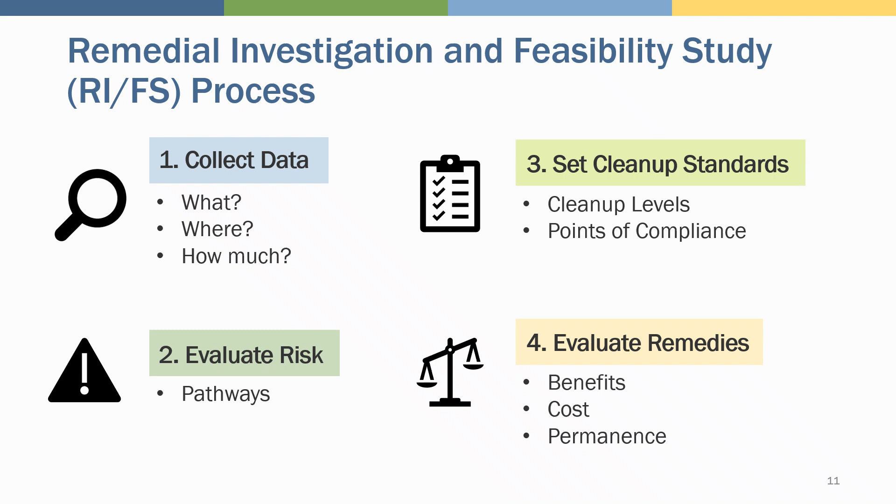As we go through the Rayonier Mill study area, I will try to cover what we know about the contamination, pathways of exposure, cleanup levels, and the selected remedy for each media, such as sediment, soil, and groundwater. So let's dive into the Rayonier Mill study area.

One of the challenges we have had with the Rayonier Mill site is defining the site boundary—that is, where has all of the contamination come to be. The challenge has been in the off-property area from wind-blown pollution and the spread of contamination in the harbor. So Ecology and Rayonier agreed to focus on a study area, or a portion of the site, as shown here. Our March 2010 agreed order with Rayonier is for this study area. We will be evaluating the off-property contamination separately.

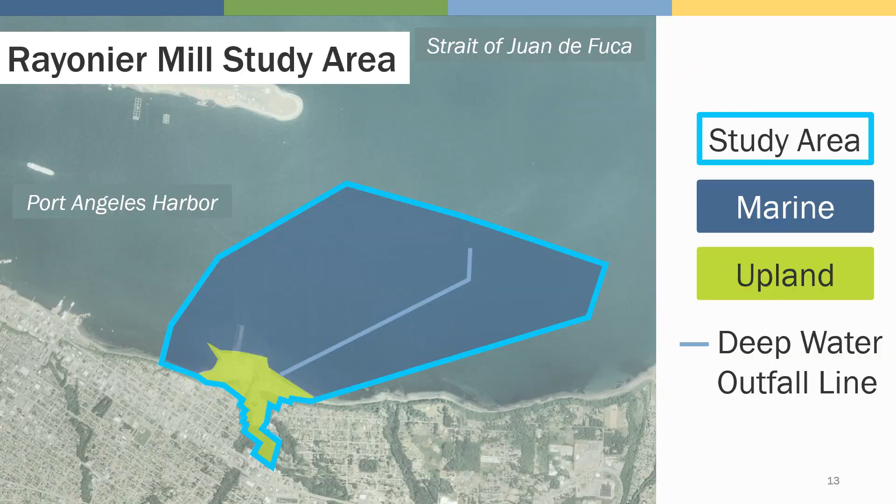This shows the relationship between the Rayonier Mill and Western Harbor study areas. Both cleanup projects address the entirety of the harbor.

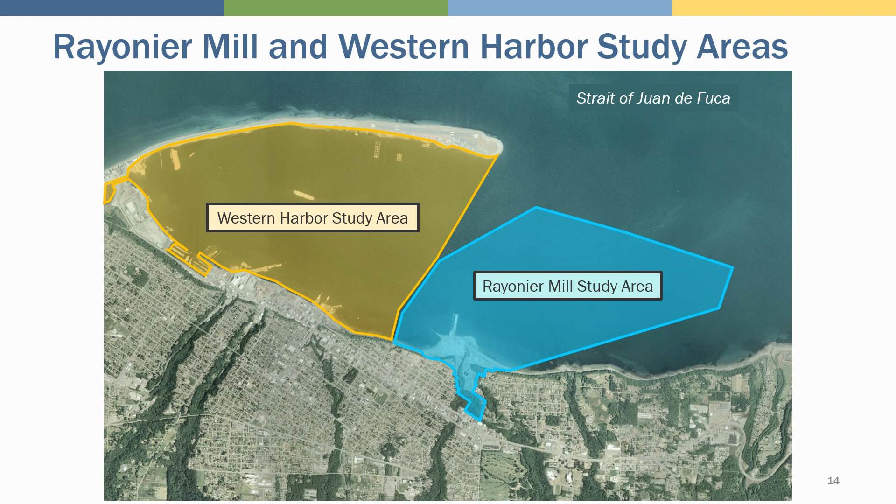Before I launch into the history of the Rayonier Mill, I thought I would clarify the company names: Rayonier, RYAM, and RAMP. Rayonier Inc. owned and operated the mill at the time of release of contamination. In 2014, Rayonier Inc. split into two companies: Rayonier Inc., the Forest Resources and Real Estate entity, and Rayonier Advanced Materials, the Performance Fibers entity. This second entity is also known as RYAM.

In addition, there is Rayonier AM Properties LLC, which manages the environmental liabilities. This is known as RAMP. Both RYAM and RAMP have signed the consent decree. When we say Rayonier, and I say it a lot, we are generally referring to RYAM and RAMP.

The Rayonier Mill operated for nearly 70 years, from 1930 to 1997. When the mill closed in 1997, Rayonier systematically dismantled the facility and completed several interim actions on the property. The mill property holds great cultural importance to the Lower Elwha Klallam, Jamestown S'Klallam, and Port Gamble S'Klallam tribes.

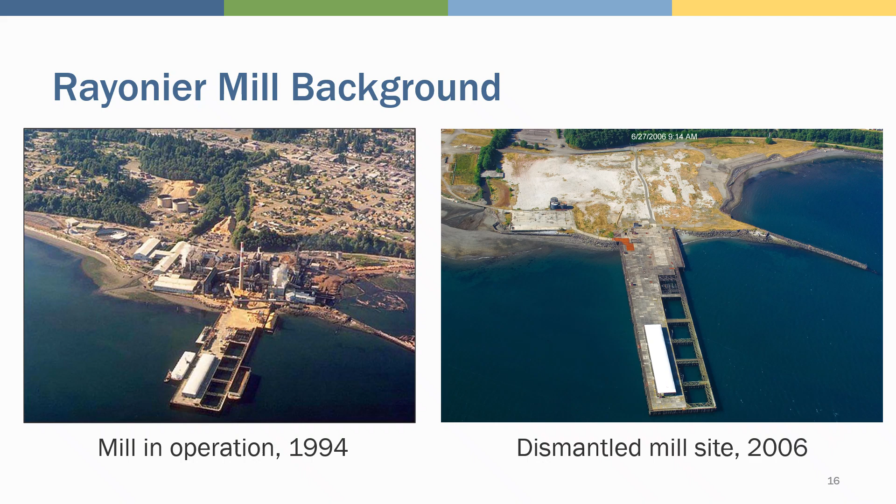This is a schematic of the mill operations. The mill was a pulp mill making pulp from wood chips using an acid sulfite process. The mill had 5 outfalls, which discharged untreated wastewater directly to the harbor until 1972, when Rayonier built the large storage tanks and treatment process for their wastewater. The treated wastewater was then discharged from the deep water outfall.

Mill operations caused contamination of the mill property and nearby marine environment. Contamination came from air emissions from a hog fuel boiler, fuel spills, releases from electrical equipment and other mill activities, and discharge of untreated wastewater to the harbor.

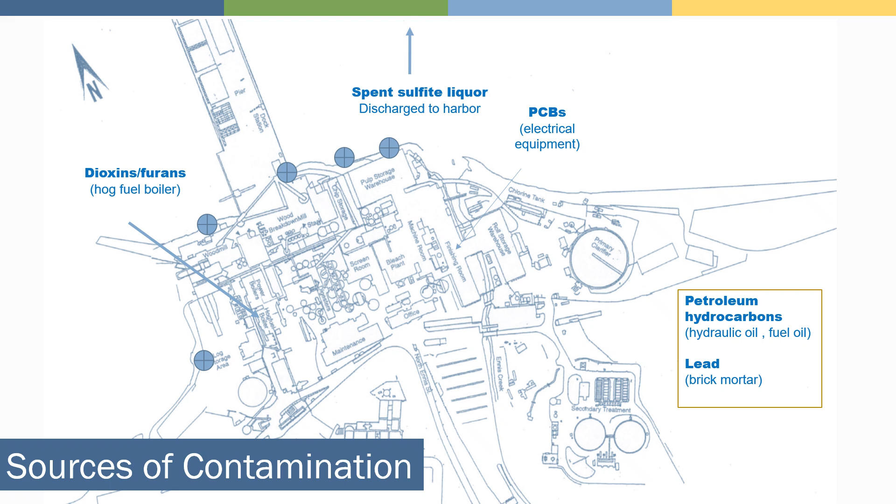In the early 2000s, Rayonier conducted several investigations which identified some high-level contamination areas, or hotspots. Rayonier conducted several interim actions. This figure shows the locations of the interim actions. Over 30,000 tons of contaminated soil were removed and taken to appropriate disposal facilities. Most of the contaminated soil was disposed of at the City of Port Angeles sanitary landfill, and petroleum-contaminated soil was taken to a treatment facility in the Tacoma area.

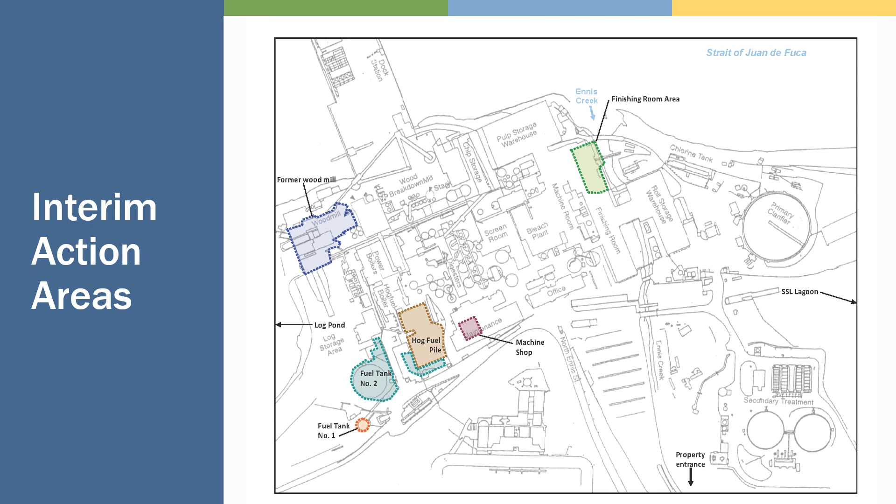Rayonier has completed a remedial investigation for the upland portion of the study area, or Volume 1, a remedial investigation for the marine portion of the study area, or Volume 2, and a feasibility study for the whole study area, or Volume 3. Ecology conducted a public comment period for Volumes 1 through 3 in the fall of 2019. We received about 160 comments and completed a responsiveness summary in early 2021. After making a few revisions, Rayonier finalized Volumes 1 through 3 in 2021.

Under the 2010 agreed order, Rayonier was also to complete a first draft of the Interim Action Plan, or Volume 4. While Rayonier submitted a first draft, it was not to the level that Ecology expected. As the Cleanup Action Plan, or Interim Action Plan, is ultimately an Ecology document, Ecology revised the draft we received from Rayonier into Ecology's document describing our selected remedies. This is what we are presenting for your public input.

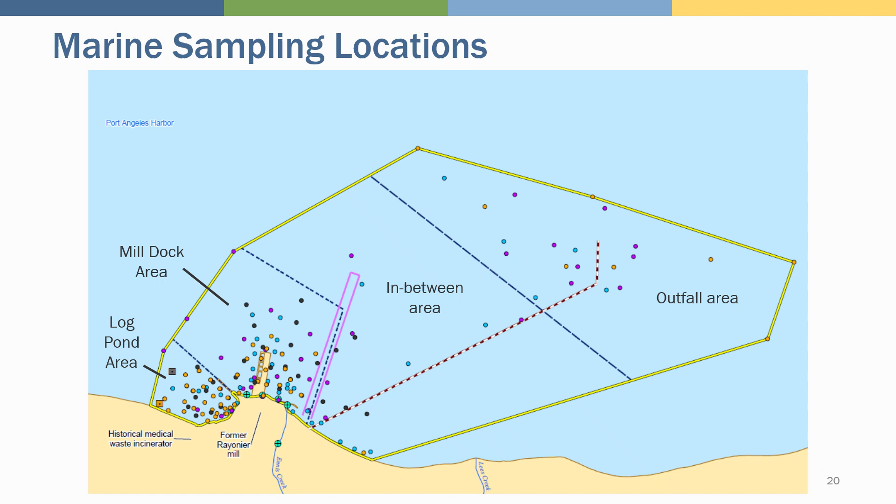Contaminants found in sediment and tissue include heavy metals like arsenic and mercury, polychlorinated biphenyls or PCBs, polyaromatic hydrocarbons or PAHs, and dioxins. Sediments also have phthalates and phenols and wood debris. Toxicity testing shows toxic effects to benthic organisms, the small critters that live in the sediment. The higher contamination and toxic effects are near the mill, around the dock, and in the log pond. I'll show the contamination pattern in a few more slides.

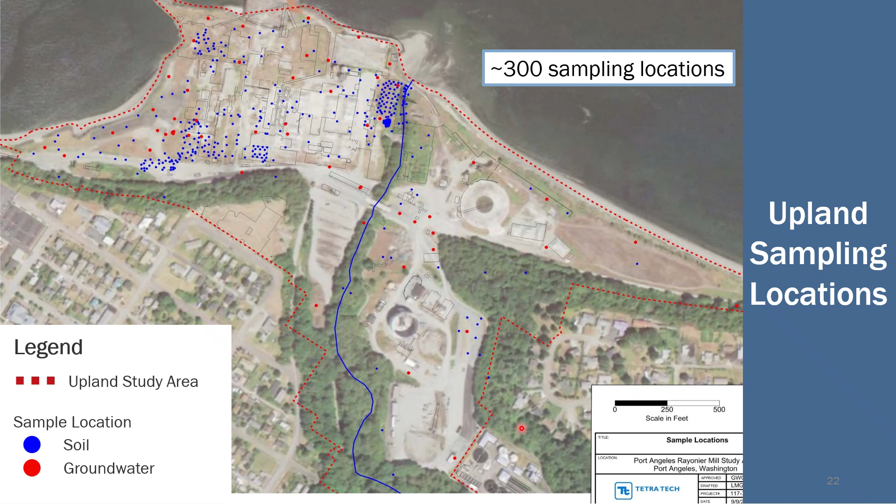Contaminants found in soil include heavy metals like arsenic and lead, polychlorinated biphenyls or PCBs, polyaromatic hydrocarbons or PAHs, dioxins, and petroleum hydrocarbons. Contaminants found in groundwater include PAHs and ammonia. The presence of ammonia has caused the pH of groundwater in some areas to be very high. The high pH can cause the metals in soil to release and go into groundwater, so we also see metals in the groundwater. Most of the highest soil contamination, or hotspots, have been removed.

Both soil and groundwater contamination is spotty without a clear pattern, and kind of all over. We see higher soil concentrations in the West Mill area and higher concentrations in the surface soil rather than at depth.

We evaluated the risk from these contaminants and determined that there are complete exposure pathways. Humans and wildlife and plants can come into contact with contaminated soil. Contaminated groundwater can reach the marine environment, potentially impacting the water and the sediments. Contamination in the sediments is bioaccumulating into fish and shellfish, to which humans and other animals can be exposed. And the creosote pilings and timbers are an ongoing source of PAHs to the sediments.

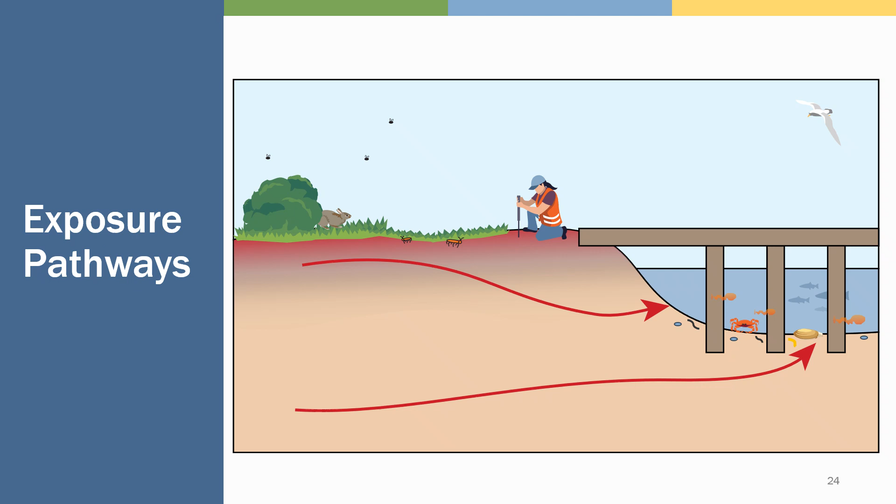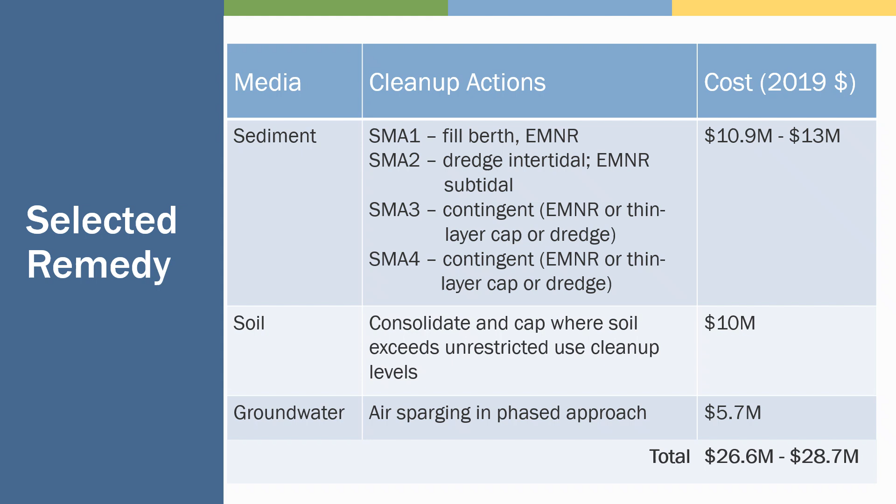So we selected remedies for each media to address these pathways of exposure. This is a summary of the selected remedies as presented in the draft Interim Action Plan. The costs are those from the Volume 3 report, so are in 2019 dollars. The costs are likely higher today due to inflation. The overall cost is around $30 million. I'm going to go through each of the cleanup media and walk through these selected remedies.

Let's start with the sediment media. Sediment is the sands and mud under the water. Again, the main contaminants in sediment include metals, PAHs, PCBs, and dioxins. We set sediment cleanup levels to protect for bioaccumulation from sediment into fish and clam tissue that humans or other animals may eat. We also set sediment cleanup levels to protect the benthic organisms, or critters that live in the sediment. The sediment cleanup levels generally need to be met in the top 10 centimeters or 4 inches, and deeper, such as 45 centimeters or 18 inches, in areas where we dig clams.

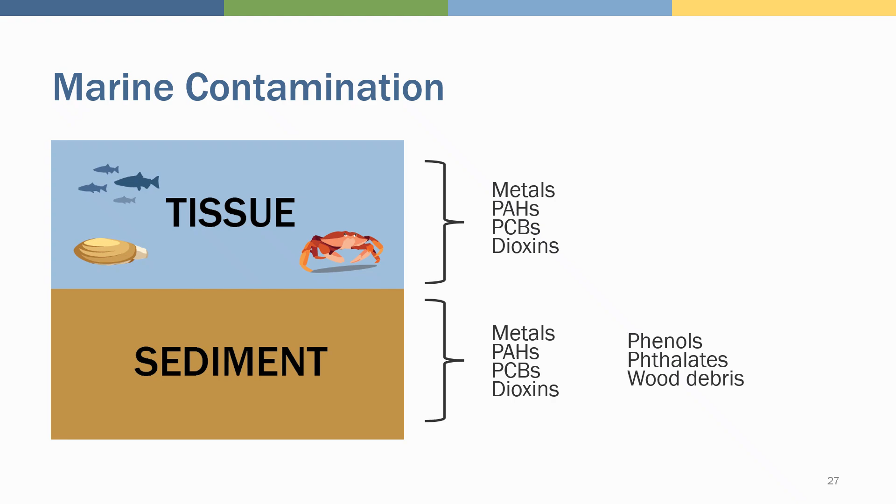This figure shows the concentration of PCBs, or polychlorinated biphenyls, and dioxins in sediments. We show these as total TEQ, or toxic equivalent. Dioxins and PCBs are chemically and toxically very similar, so we combine them into a TEQ. TEQ stands for toxic equivalent and is a special sum where the concentration of each individual contaminant is adjusted based on how toxic they are, and then they are summed together. The green, yellow, and orange are above the sediment cleanup levels. This figure shows the contamination is close to the mill dock and in the log pond area.

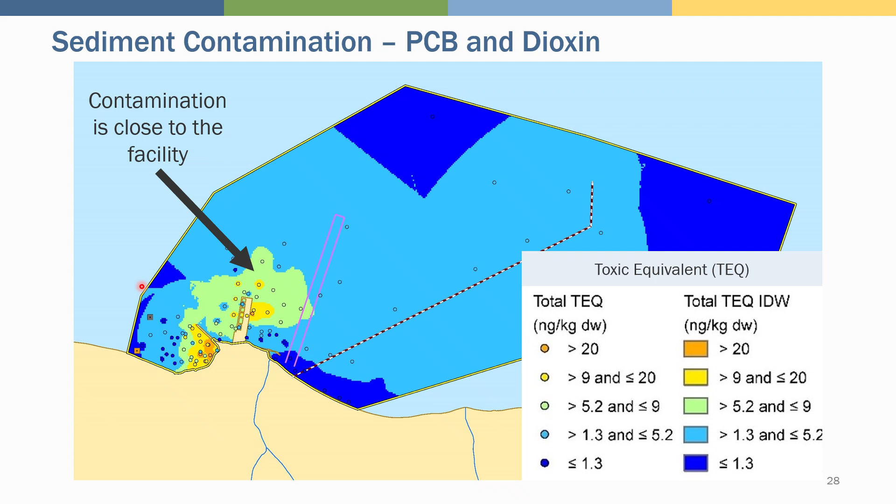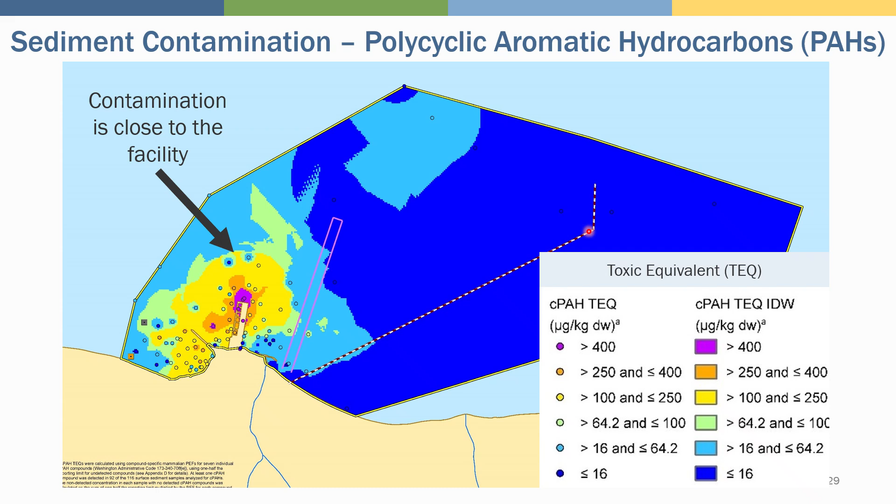This figure shows the polycyclic aromatic hydrocarbons, or PAHs. Again, the green, yellow, and orange are above the sediment cleanup levels. The figure shows contamination is close to the facility, around the mill dock, and in the log pond. The sediments out by the deep water outfall meet cleanup levels for PCBs, dioxins, and PAHs.

This figure shows the sediment remediation footprint. The bold red line is the footprint. This captures the PCBs, dioxins, and PAHs. It also captures areas where contaminants show toxicity based on bioassays. We need to take cleanup action within this footprint to reduce exposure to contamination. Beyond the bold red line, the sediments meet cleanup levels and no action is needed.

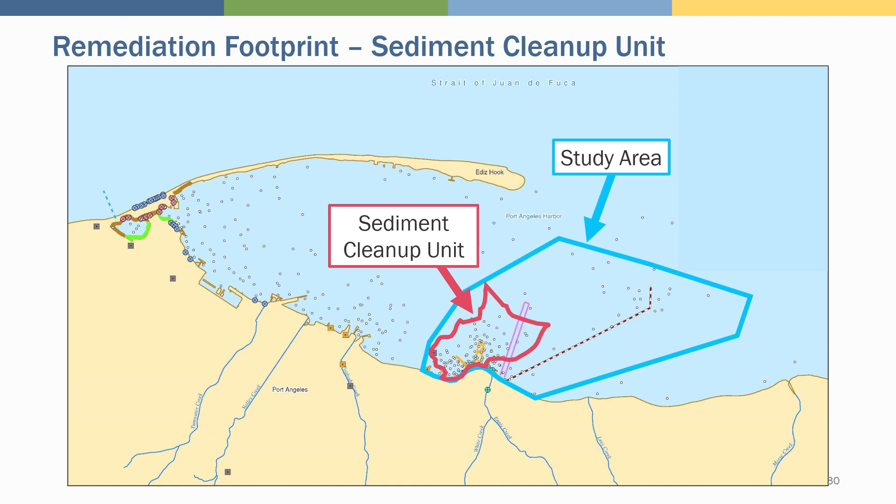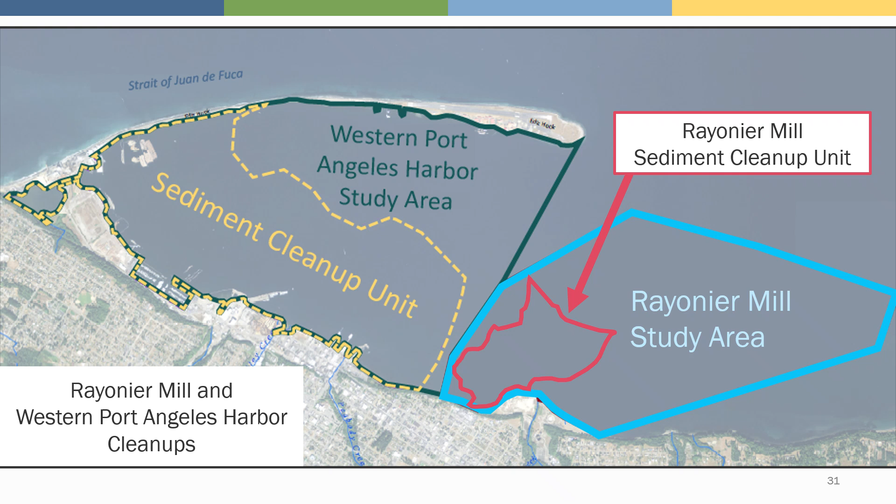Earlier this year, Ecology presented the Cleanup Action Plan for the Western Port Angeles Harbor Study Area. I thought I would show a comparison of the two study areas and the two sediment cleanup units. Cleanup actions will take place within these two sediment cleanup units, addressing contamination in the whole of Port Angeles Harbor.

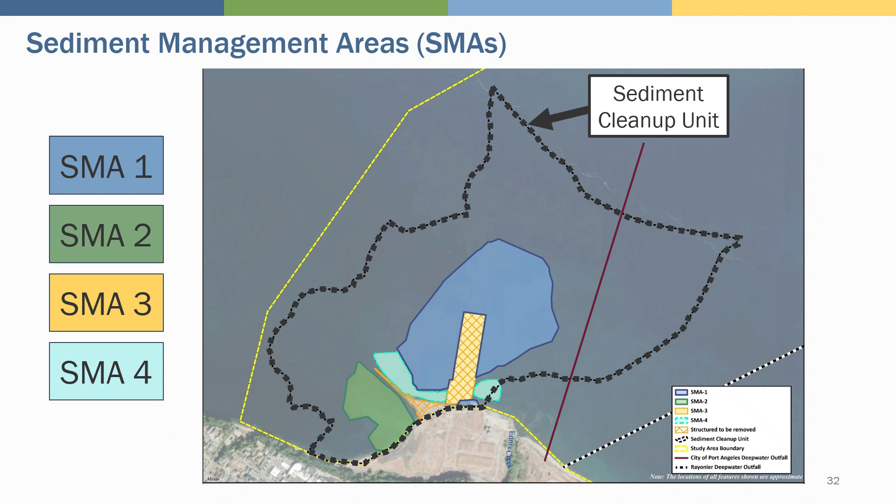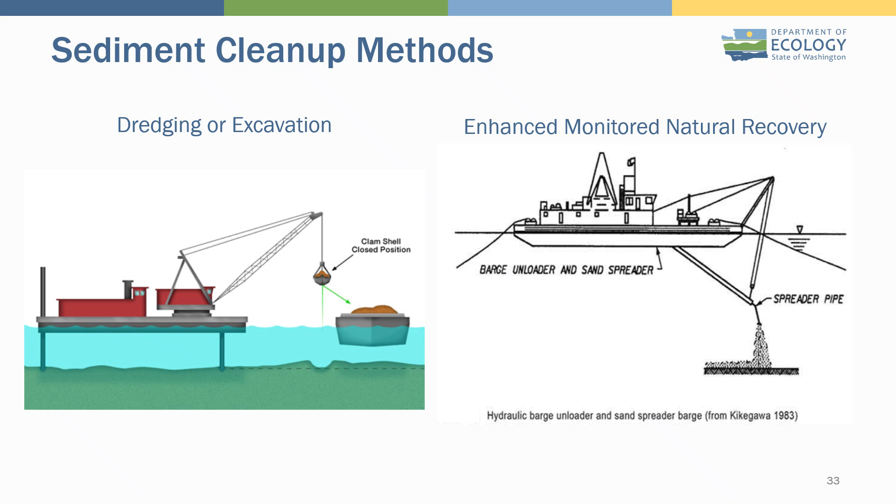For SMA 3 and SMA 4, under the dock and in the nearshore, the remedy is a contingent remedy. SMA 3 is the area under the dock. The very large dock structure has made it difficult to sample sediments under the dock, and we have only 3 data points. We also have limited data in SMA 4, the nearshore area.

The dock has over 4,000 creosote pilings, which are an ongoing source of PAHs to the sediments. Ecology is requiring the removal of treated timbers from the dock and the jetty to remove this source of contamination. In addition, the Department of Natural Resources, or DNR, is requiring the removal of the dock and jetty as part of closing the lease agreement, and I will talk a bit more about that in a few slides. So the dock and jetty are to be removed. That is what is shown here with the yellow crosshatching.

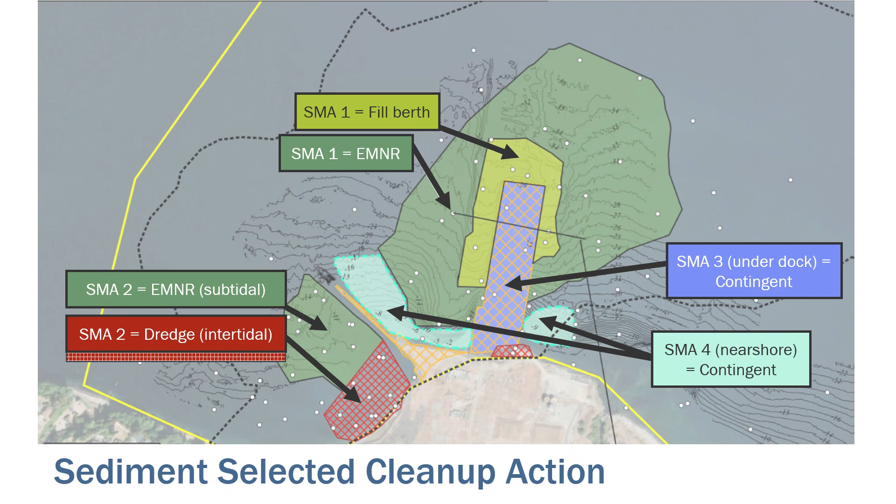Now let's go over the soil media.

As a reminder, contaminants found in soil include heavy metals like arsenic and lead, PCBs, PAHs, petroleum hydrocarbons, and dioxins. We set soil cleanup levels to protect humans, wildlife, and plants that come into direct contact with soil. And we set soil cleanup levels to protect groundwater, that is, soil contamination being washed with rainwater into the groundwater. For the Rayonier site, most of the cleanup levels are set to protect humans from direct contact.

A portion of the property with the 5 million gallon tank was purchased by the city and will keep being used for industrial purposes. The cleanup in this area will need to meet industrial cleanup levels.

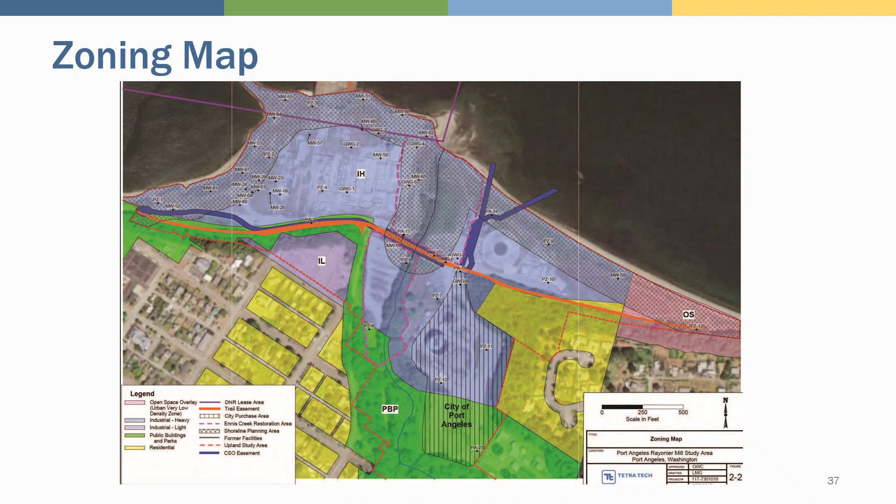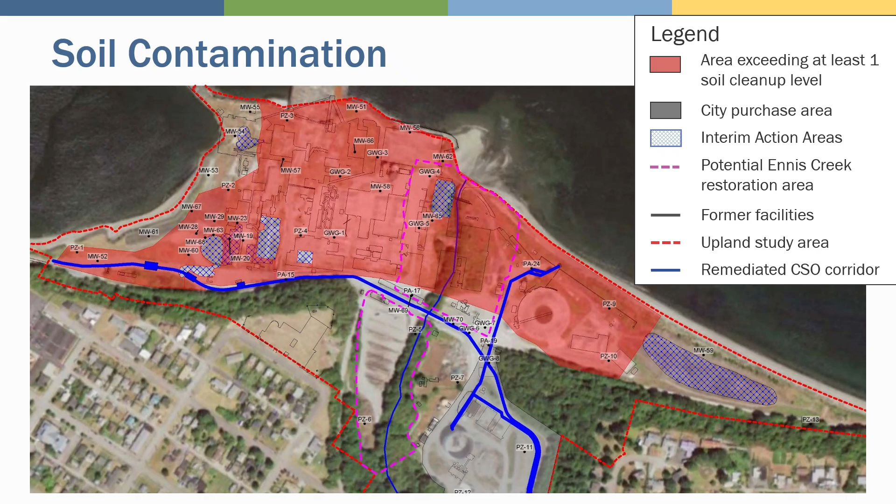For soil cleanup, we selected alternative SL3 as described in Volume 3. It is a remedy that removes all soil above the unrestricted use cleanup levels and consolidates in the West Mill area under a 2-foot cap of clean soil.

In this remedy, we will not require institutional controls, such as use restrictions, over a large portion of the site. There will be controls in the capped area. However, this does not preclude possible future use of the property in the West Mill.

Future development will have to be planned with the cap in mind, but the cap can be designed to allow for such development, or the cap can be modified for future development.

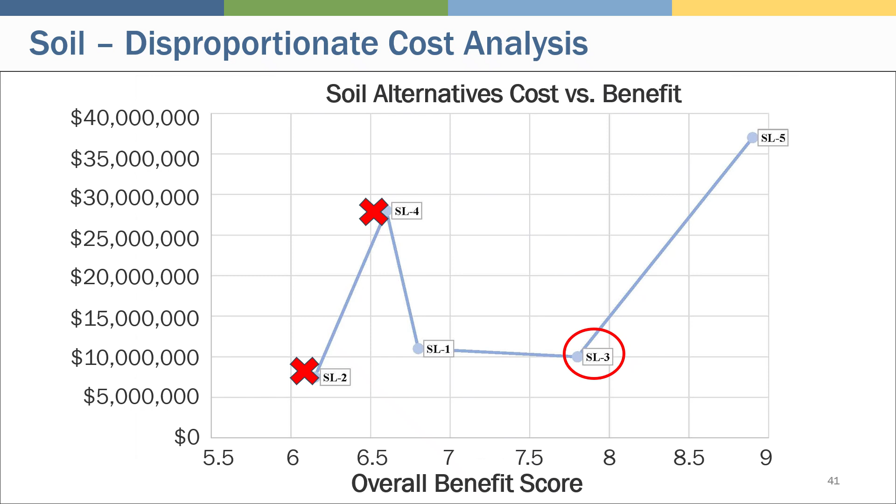SL3 also has a high degree of benefit but a much lower cost at $10 million. The cost difference between SL5 and SL3 is substantial and disproportionate at $27 million. SL3 is the most cost-effective remedy and considered permanent to the maximum extent practicable.

I know there are concerns about capping contaminated soil on a property near the shore. This type of remedy is fairly common as it is protective and cost-effective. Another site where capping dioxin-contaminated soil near the shore is the Port Gamble Bay and Mill site. At this site, nearly 26,000 tons of contaminated soil were removed during interim actions, similar to the Rayonier Mill site. And now they are capping about 6 acres of the property where elevated dioxins remain in the soil.

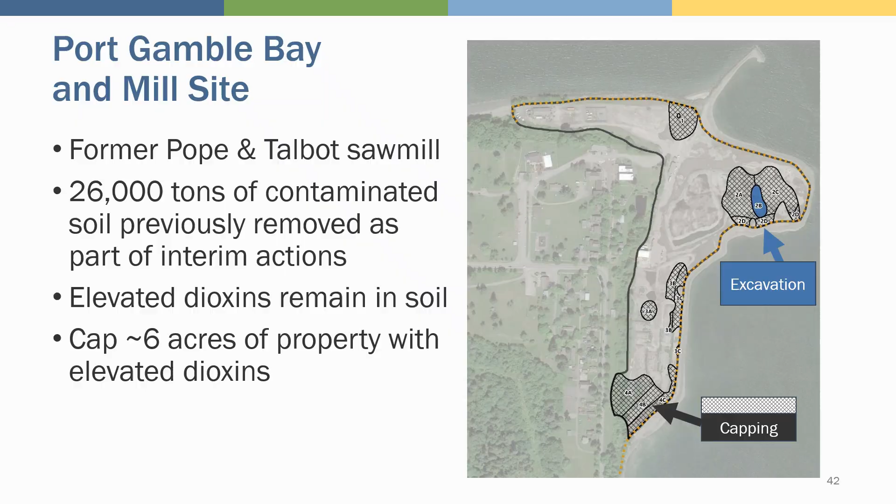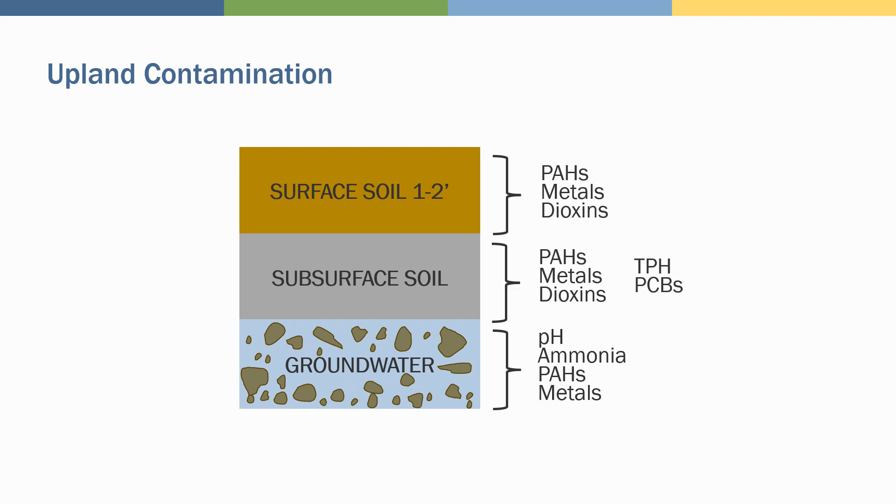Let's move on to groundwater. As a reminder, contaminants of concern found in groundwater include PAHs and ammonia. The ammonia has caused the groundwater to have a high pH in areas, which has caused the metals to release from soil and move into groundwater. Since the Rayonier property is next to the marine water, salt water is mixing with the groundwater beneath the site. This makes the groundwater not drinkable. So we set the groundwater cleanup levels to protect the marine water and sediment and not to protect groundwater for drinking water.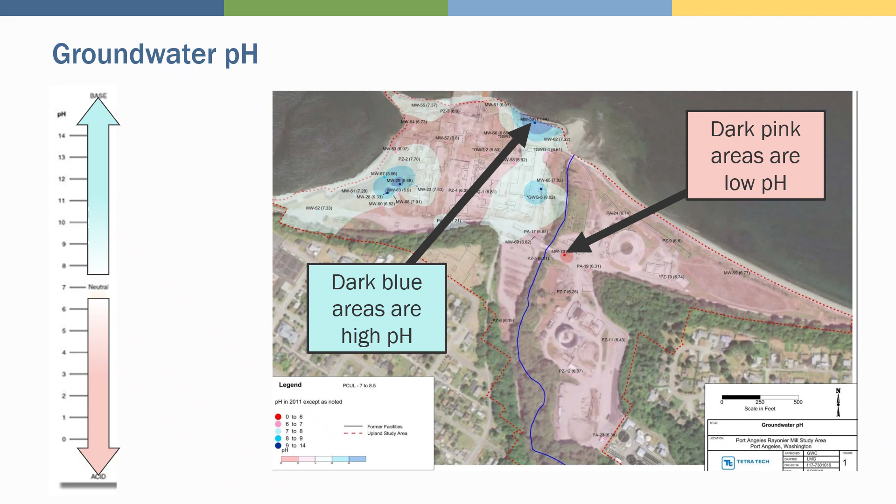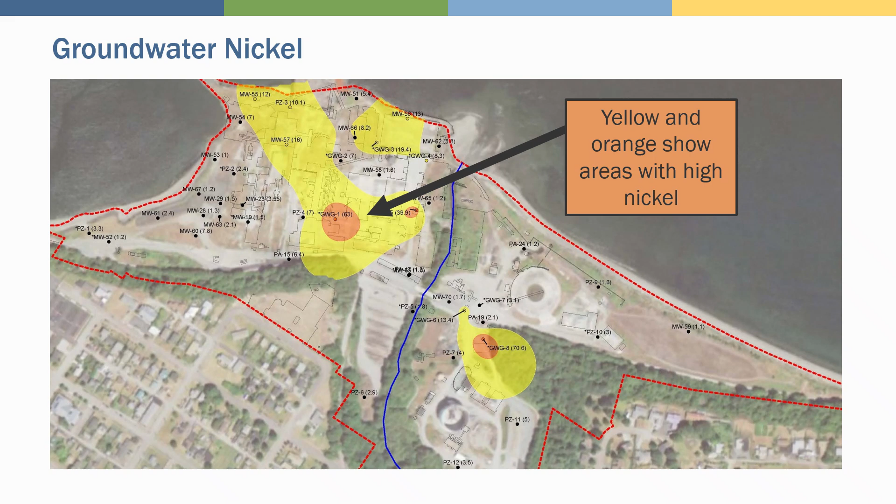I just picked nickel as one of the metals we see in groundwater above cleanup levels. Here we see elevated nickel in the yellow and orange areas. Much of the nickel exceedances line up with where we see ammonia and high pH. This figure shows where groundwater has at least one contaminant above cleanup levels. This is all over the place, but there is no clear plume of contamination.

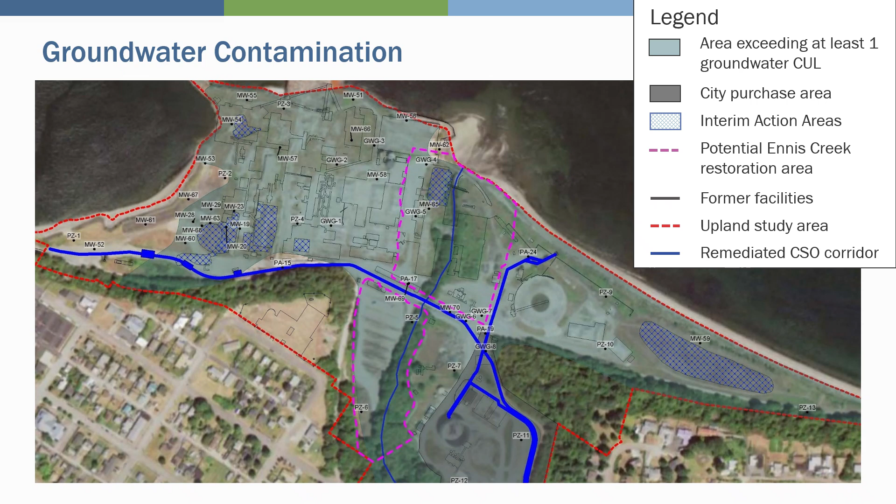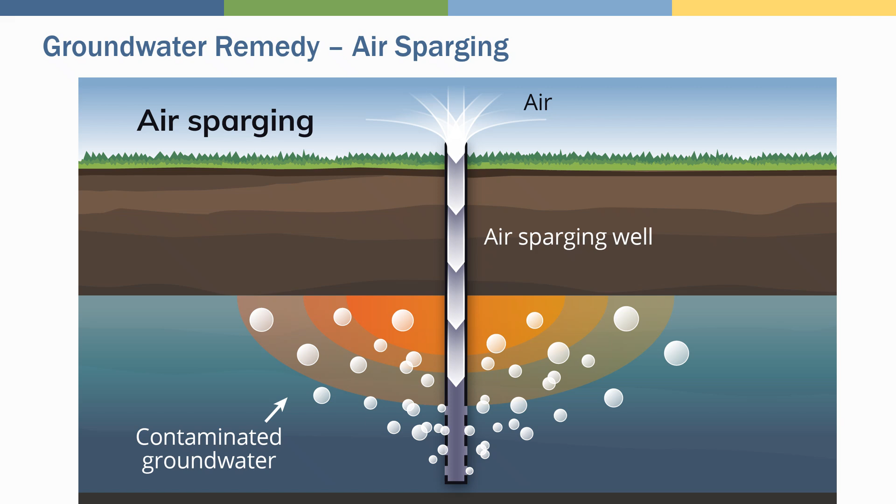For groundwater cleanup, we selected the remedy recommended in the feasibility study. In this alternative, groundwater is treated prior to discharge to the marine environment. Air sparging uses special wells called air sparging wells to pump compressed air deep into the ground. The pumped air raises oxygen levels in the groundwater. As the air bubbles rise toward the surface, they help naturally occurring bacteria break down harmful chemicals. The oxygen also helps reduce other contaminants like ammonia, which should neutralize the pH and thus reduce the metals releasing into groundwater.

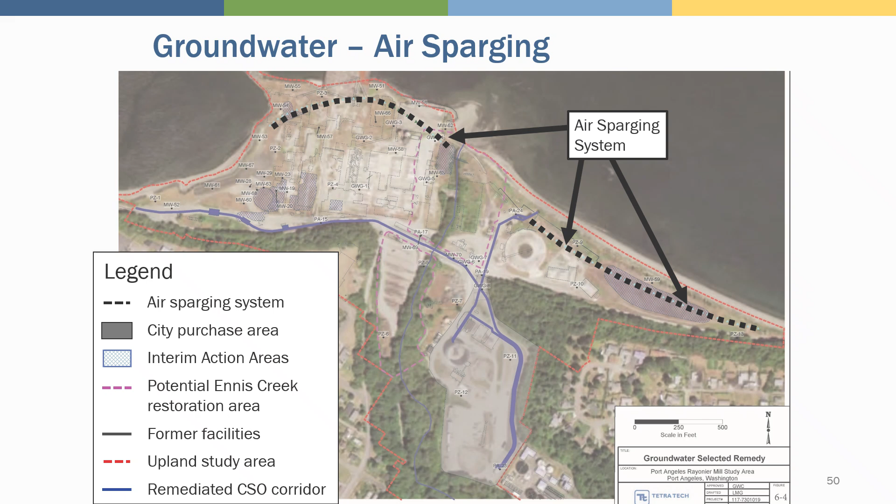It is impractical to treat the groundwater throughout the property as it is difficult to inject air over such a large area, and the costs are very high. So the air sparging will be applied along the shoreline, treating the groundwater before it discharges to the marine environment. This is alternative G1, which is about $5.7 million. The groundwater will be monitored using an ecology-approved network of shoreline monitoring wells.

Lastly, let's go over surface water. 5 surface water samples were collected in Ennis Creek, 2 upstream and 3 downstream. Metals were detected below cleanup levels, and dioxins were detected slightly above cleanup levels. The dioxin levels were the same both upstream and downstream, which indicates that the site is unlikely to be contributing to contamination in Ennis Creek.

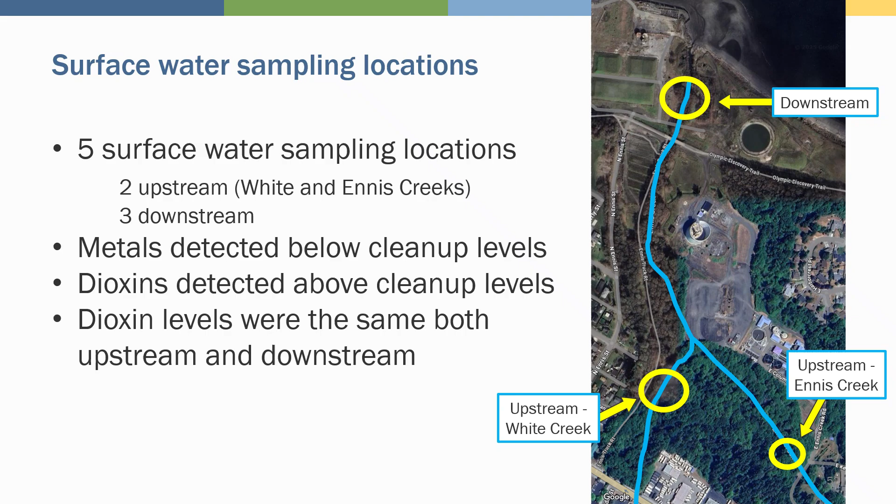So the selected remedies are summarized here. The sediment remedy includes some dredging and EMNR, and the soil remedy includes consolidating contaminated soil that is above unrestricted use cleanup levels and capping with a 2-foot thick soil cap. The groundwater remedy includes air sparging the groundwater. The overall cost is around $30 million.

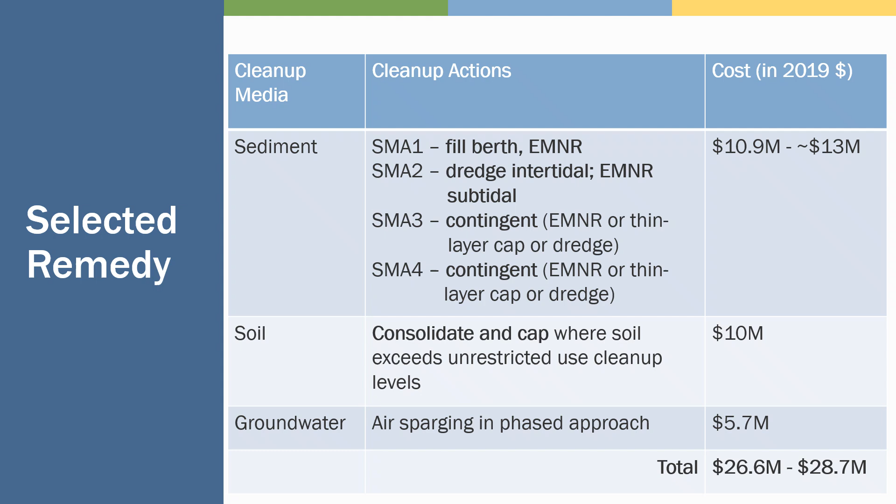So now let's go over how cleanup and structure removal and potential restoration tie together.

RAMP is working with DNR and Ecology to remove the dock and jetty and to reshape the shoreline, making it flatter. These efforts should support any potential restoration work on Ennis Creek by connecting habitat along the shore.

The creosote pilings are a source of contamination to the sediments. Ecology is requiring the removal of the treated pilings. We are also requiring RAMP to clean up contaminated sediment at the same time they remove the dock and jetty, and to clean up contaminated soil in the area where the shoreline will be reshaped.

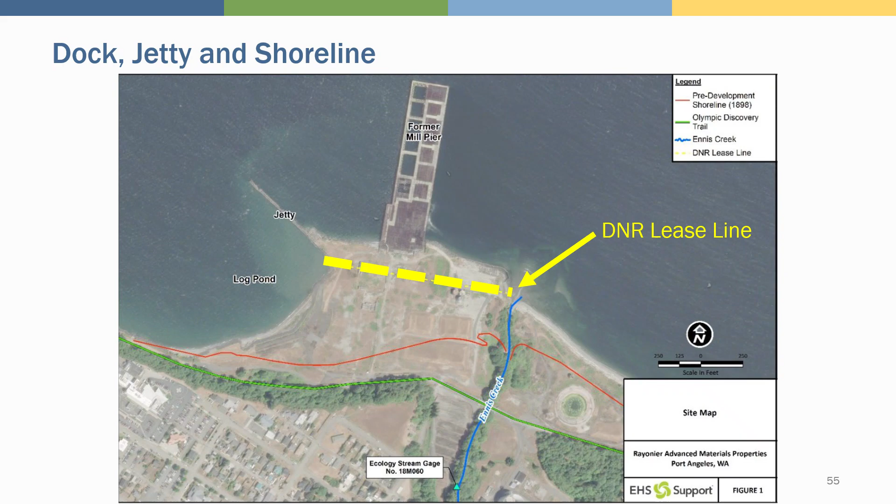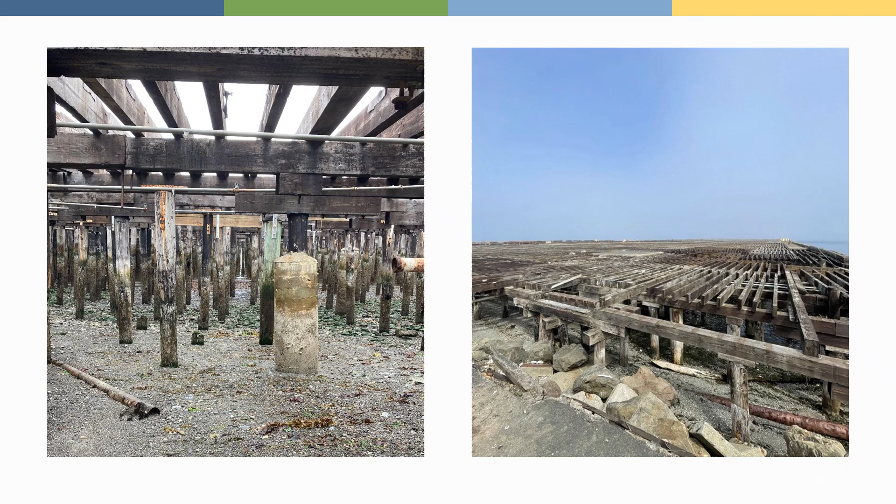The dock is a very large structure, the size of an aircraft carrier. RAMP has already started dismantling the dock. Approximately 800 concrete deck panels have been removed, and the dock has over 4,000 pilings. That's a lot of material to manage.

Another environmental liability for RAMP is environmental damages from pollution under the Natural Resource Damage Assessment, or NRDA, program. There is a Port Angeles NRDA Trustee Council made up of NOAA, U.S. Fish and Wildlife, Ecology, and the Lower Elwha Klallam, Jamestown S'Klallam, and Port Gamble S'Klallam tribes. For several years now, the trustees and RAMP have been negotiating a potential restoration project for Ennis Creek to address RAMP's NRDA liability. A settlement has not been reached.

Soil cleanup in the area of Ennis Creek will meet unrestricted use cleanup levels in order to fully support any potential future restoration of the creek.

Let's talk briefly about the consent decree. A consent decree is a legal document that lays out the parties involved, the work to be performed, and the schedule for that work. It also describes the process of payment of costs, how to request schedule extensions, and a process for dispute resolution. A consent decree is different from an agreed order, where the parties agree to perform certain actions. Consent decrees are filed in court and the parties agree to be bound by its terms. A consent decree also lays out the terms for legally settling liability.

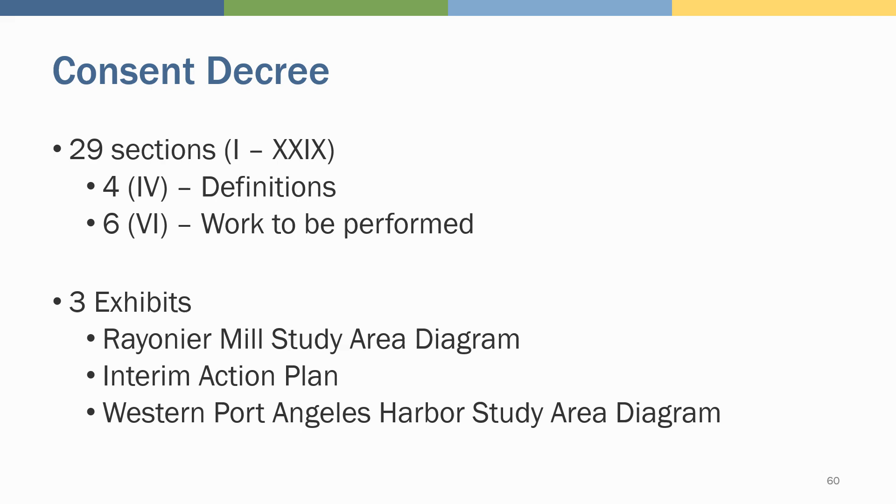So to wrap up, we've covered the Interim Action Plan and the consent decree. After the public comment period, we will respond to comments in a responsiveness summary and make any necessary revisions, then finalize these documents. RAMP will move forward with the steps outlined in Section 7 of the Interim Action Plan.

Ecology will review and respond to public comments. If updates to the documents are needed, they will be revised. The final documents will be submitted to the Superior Court for approval.

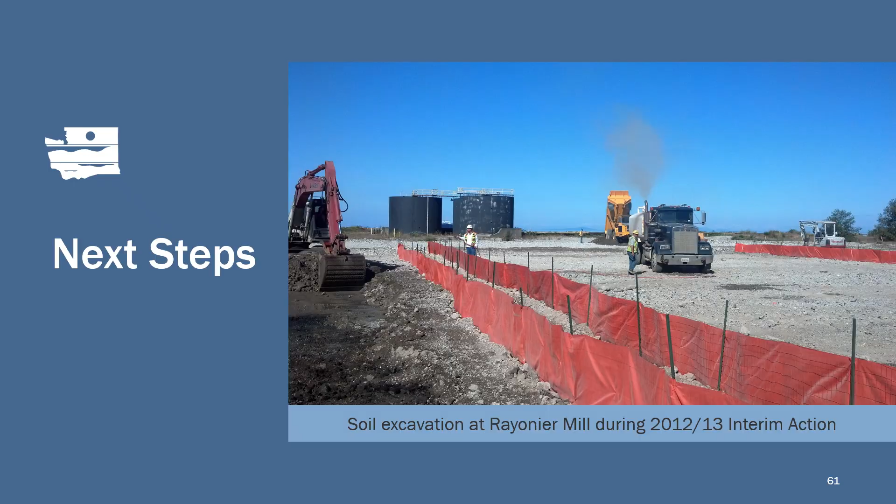Section 7 of the Interim Action Plan is where you will find the next steps and schedule. It's important to note that there is a lot of work that still needs to happen before we start cleanup construction. First, RAMP will complete the hydrodynamic modeling and sediment sampling already underway.

Then we can select the most appropriate remedy for under the dock and in the nearshore, and use the modeling to help design other cleanup elements. Then RAMP will develop a master plan and schedule recommending the best way to phase the work.

Then there is data collection for engineering design, such as refining where soil exceeds the cleanup levels and determining just where to place groundwater wells for air sparging.

Next, we enter the design and permitting stage. RAMP will look at all the data and engineering evaluations and prepare the engineering design reports and obtain necessary permits. RAMP and Ecology will consult and coordinate with the tribes on cultural resource protection. These documents will assess risks due to a changing climate and make sure our project is resilient.

Then we get to construction. All of the design, permitting, and construction is currently estimated to take 7 to 10 years. Construction work in the water can only occur during certain times of the year in order to protect migrating fish.